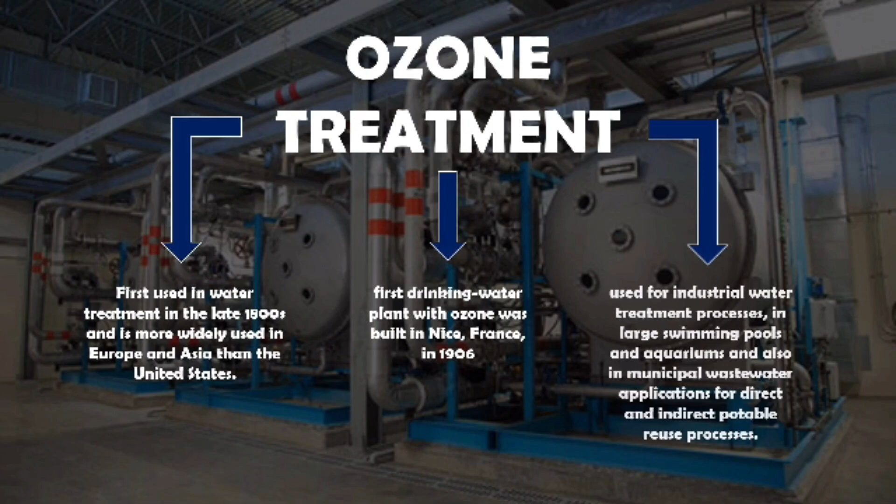Ozone is also used for industrial water treatment processes in large swimming pools and aquariums, and also in municipal wastewater applications for direct and indirect potable reuse processes. This leads us to why ozone treatment is being used. Well, first of all, it has a greater disinfection effectiveness against bacteria and viruses compared to chlorination.

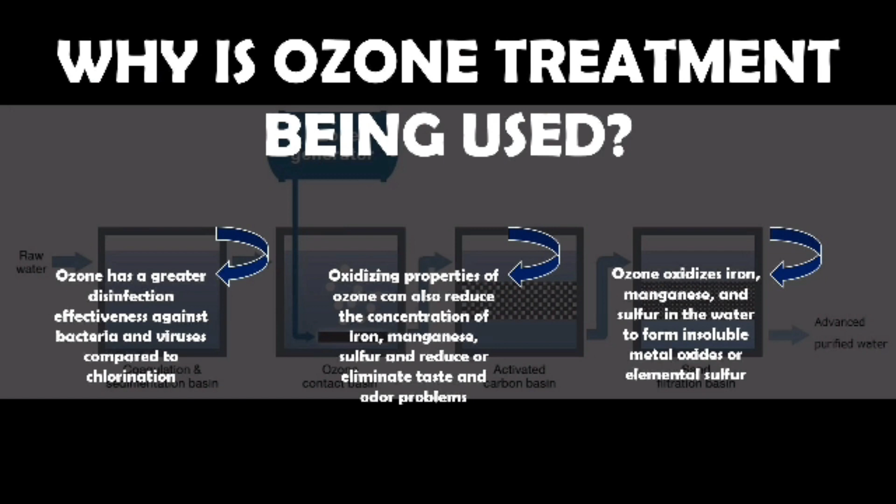In addition, the oxidizing properties of ozone can reduce the concentration of iron, manganese, sulfur, and reduce or eliminate taste and odor problems. It also oxidizes the iron, manganese, and sulfur in the water to form insoluble metal oxides or elemental sulfur, which will then be removed by post-filtration, which my colleague will explain further in the operations later on.

So here is the history of ozone in drinking water treatment. Van Marum, a Dutch chemist, was likely the first person to detect ozone gas. Yet, as in Schonbein's writing in 1840, the finding of ozone was only brought up by name decades later. Van Marum once recognized the characteristic smell around his electrifier, and the same characteristic was observed by Schonbein through his experiments.

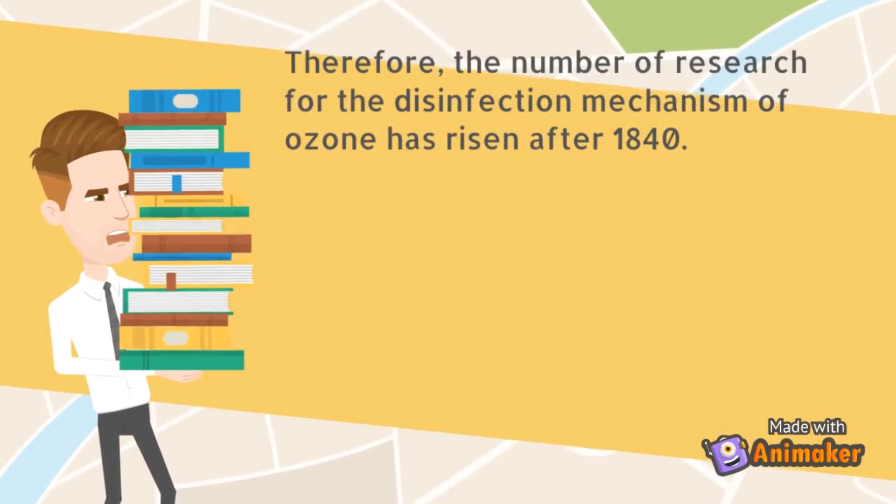The word from Greek gave ozone its name for the gas. In general, Schonbein is credited with the finding of ozone, and he was also recognized as the earliest person in research on the reaction mechanisms of ozone and organic matter. Therefore, the amount of research on the disinfection mechanism of ozone has risen after 1840.

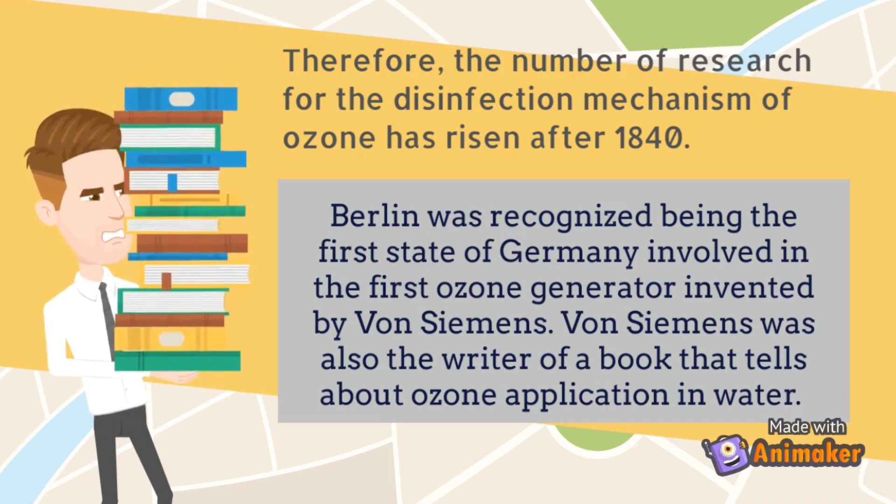Berlin was recognized as the first state of Germany involved in the first ozone generator invented by von Siemens. Von Siemens was also the writer of a book about ozone application in water. Other than that, there was also a French chemist and doctoral graduate from a French university named Marius-Paul Otto, recognized as the first person to initiate a company for manufacturing ozone installations.

In 1893, the French scientists installed the first technical scale application of ozone in Oudshoorn, Netherlands. In 1906, another installation was in Nice, which resulted in Nice being recognized as the birthplace of ozone for drinking water treatment. There was a rising number of ozone installations in many countries before the beginning of World War I. Nevertheless, the number of installations decreased as there was a finding of toxic gases.

After World War II, ozone production increased again. But today, chlorine is more preferable to ozone for water disinfection. Yet, scientists are still working on research about alternative disinfection, as in 1973 there was the discovery of trihalomethanes as a harmful disinfection byproduct of chlorine disinfection.

Let's move on to the ozonation process. The formation of oxygen into ozone occurs with the use of energy. This process is carried out by an electric discharge field as in the CD type ozone generator, which is corona discharge simulation of lightning, or by ultraviolet radiation as in the UV type ozone generator, which is a simulation of the ultraviolet rays from the sun. In addition to these commercial methods, ozone may also be made through electrolytic and chemical reaction.

In general, an ozonation system includes passing dry clean air through a high voltage electric discharge. In treating small quantities of waste, UV ozonation is the most common; large-scale systems use corona discharge or other bulk ozone producing methods. So let's move on to the process.

The ozone generator will produce ozone. Then the ozone injector will create micro bubbles which will increase the solubility of ozone in the groundwater. After that, ozone is dissolved in water at the storage tank, which will produce highly ozonated water that is used to control bacteria, and water is treated. Since the ozone will react with metal to create insoluble metal oxide, post-filtration is required before entering the house.

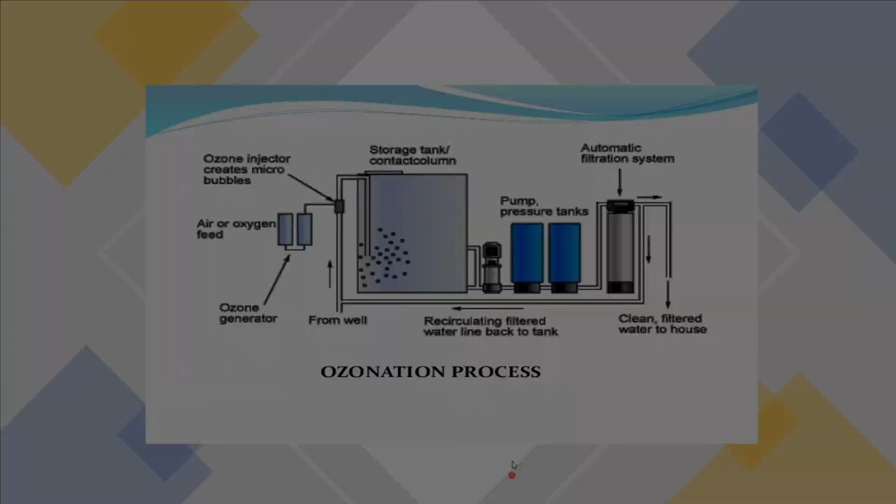Advantages and disadvantages of ozone in water treatment. When looking at the ozonation process, there are numerous advantages that come with using this process to purify water, which include the treatment process occurring without adding any kind of chemicals to the water. Besides, ozonation eliminates many impurities in water as well as a wide variety of inorganic, organic and microbiological problems. Also, ozone has very strong oxidizing power with a short reaction time, thus requires significantly less contact time to remove inorganic and organic compounds.

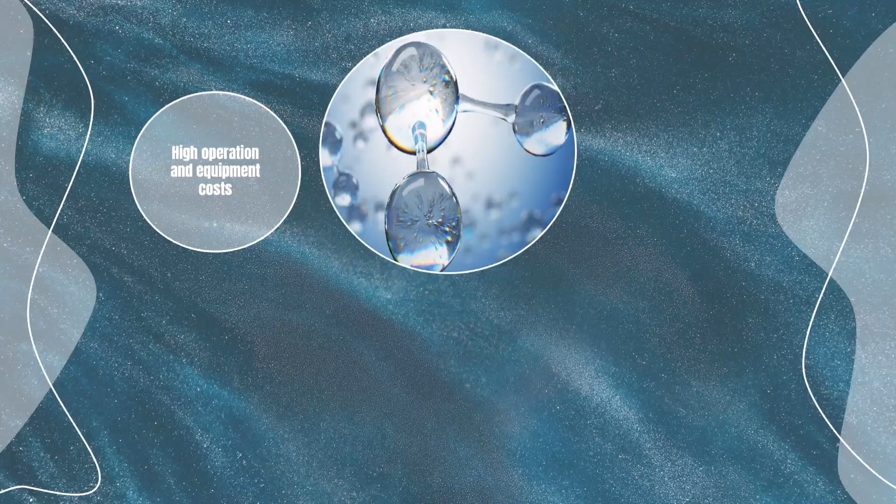However, there are also numerous disadvantages of ozonation that we should take into account, which include the operation and equipment costs for ozonation being relatively high and requiring consistent maintenance. Next, ozone is less soluble in water compared to chlorine, and therefore, special mixing techniques will need to be used in order to dissolve properly. Besides, ozonation provides no residual disinfection, which can allow regrowth of bacteria or viruses.

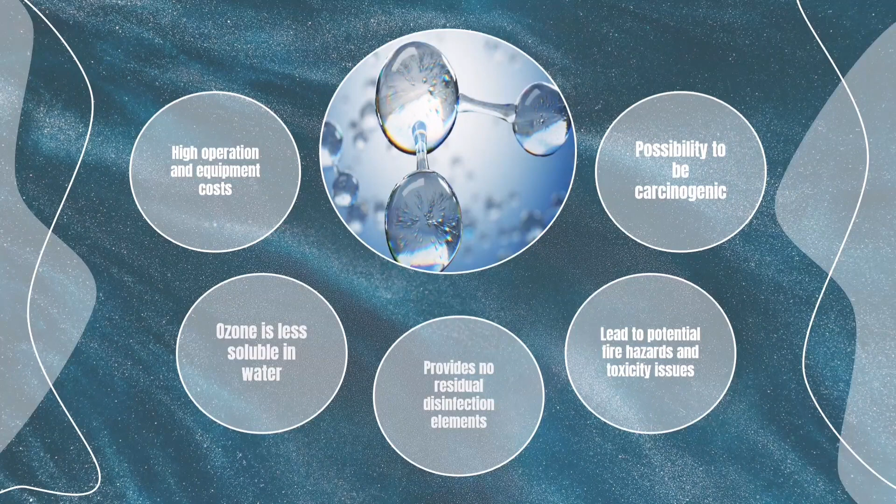Also, generating ozone may lead to potential fire hazards and toxicity issues. Lastly, ozonation byproducts are still being evaluated for the possibility of being carcinogenic. This may include brominated byproducts, aldehydes, ketones, and carboxylic acids.

In conclusion, all types of water treatment have the same objectives of making sure that the water is safe to drink and aesthetically acceptable for drinking, as we always want the best. So water agencies, large and small, want to provide their customers with the highest quality drinking water in the world. Large scale ozone technology is now well established, and its reliability and efficiency are improving rapidly.

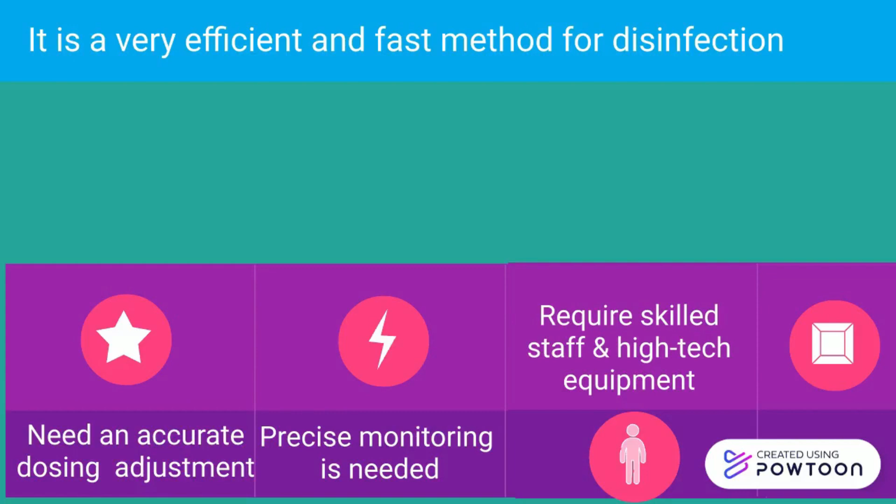As the technology has no residual disinfection effect, its application must be combined with a secondary disinfectant to maintain a residual in the distribution system. Although it has high operation and equipment costs, its power is in killing most microorganisms, oxidizing metallic ions, and degrading pollutants such as micropollutants. In fact, ozone treatment is a very efficient and fast method for disinfection. However, it also needs precise monitoring and dosing adjustment of ozone, as well as skilled staff and high-tech equipment to ensure the efficiency of the treatment.